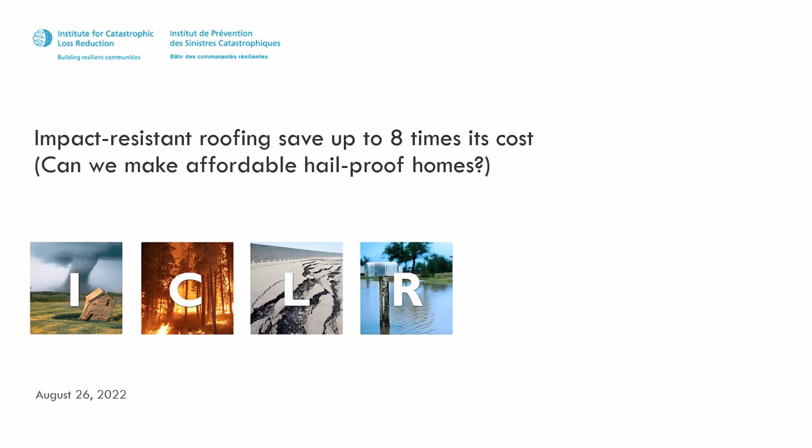All right, so with that, those preliminaries out of the way, let me introduce the topic of my presentation today. In 2021, ICLR began a study of how homeowners and insurers can save money by preventing hail damage using impact-resistant asphalt shingle roofs. And today I'm going to tell you how that study concluded after feedback from many of our members. The headline of that research is that society saves up to $8 in avoided future losses per $1 of cost, and insurers, by the way, save up to $3 per dollar spent considering retention rates.

The motivation here is that hail is among Canada's most expensive natural hazards. It costs almost $400 million annually. A June 2020 hailstorm at the edge of Calgary damaged 70,000 homes and cost $1.3 billion. A direct hit on Calgary could be 5 or 10 times worse. That's a very costly natural disaster. And although that hailstorm is inevitable, the catastrophe, the economic catastrophe, is not inevitable.

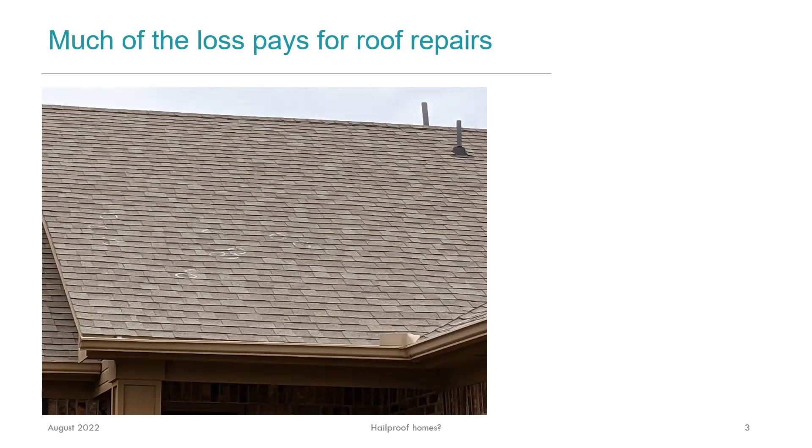Much of the losses that we see in hailstorms come from roof repairs. You can see in this picture, these little chalked circles indicate damage to roof shingles. This is in the Norman, Oklahoma hailstorm of April of 2021. We can reduce or prevent a lot of that loss by using impact-resistant asphalt shingle roofs instead of standard shingles. They look the same, but the impact-resistant ones have a special material that makes them resistant to damage.

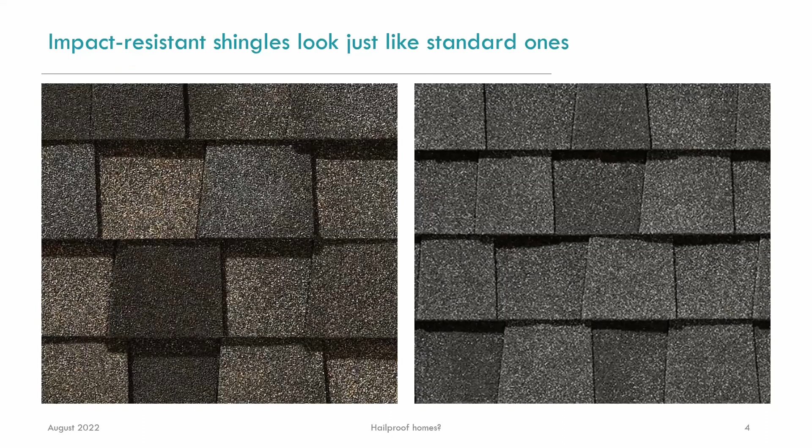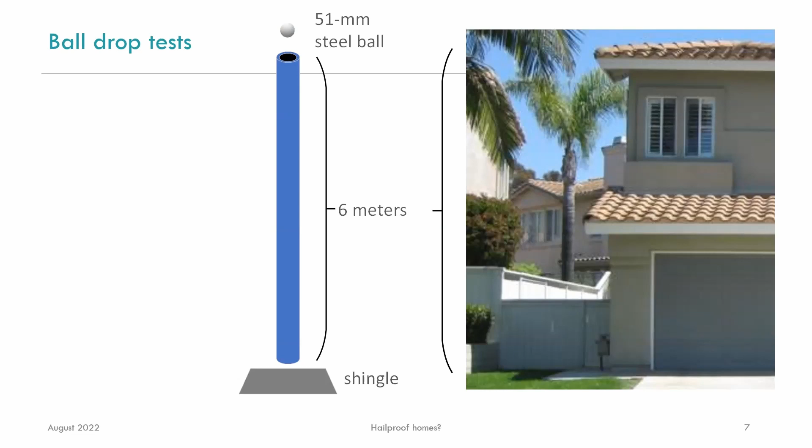In fact, you can take 51mm steel balls like this, each weighing half a kilogram, and you can drop them from a height of 6 meters, like the height of a 2-story building, onto a shingle without damaging the shingle. And that's like the strongest impact by the biggest hailstone in 99% of storms that you can resist with these shingles. Now, in order to estimate the costs and the benefits of these impact-resistant shingles, we actually had to create an entirely new analytical methodology.

I'm an engineer, so I used engineering techniques, a new technique that fits into the broad framework that engineers call performance-based engineering. And unlike most of what structural engineers do, we use building codes, and sometimes we use pass, no pass, or graded ratings. This performance-based engineering framework allows us to do some pretty neat things. We can estimate the behavior of a system, an asset like a building, in terms that people care about. Repair costs and life safety impacts and loss of functioning, or as I call them, the 3Ds, dollars, deaths, and downtime. We can treat all of the important sources of uncertainty in this analytical framework.

We can avoid reliance on expert judgment, and we can make interesting business claims about design choices without having great big piles of actuarial data on the performance of whole systems, hundreds or thousands or tens of thousands of buildings in past hailstorms. We do this by creating mathematical models that are built from bite-sized pieces of the whole process, rather than just collect a whole bunch of data. Here are 10,000 houses, and this is how many hailstones hit each one, and here's the repair cost. We build up our mathematical model from individual pieces that are more tractable.

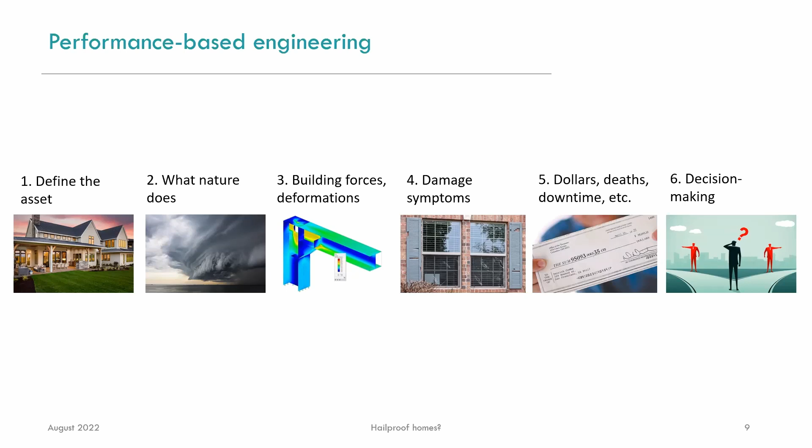So unlike building codes and most rating systems, we can estimate those behaviors in those terms of interest. We can measure all the important sources of uncertainty. When will the storm happen? And is it likely that hailstones would damage a particular shingle, etc. We can avoid recourse to expert judgment. As I mentioned before, we don't have to wait and have a great big pile of actuarial quality data on the behavior of the whole system.

We build it up from bite-sized models, and each one of those bite-sized models we can improve incrementally. The meteorologists are constantly improving our knowledge of how frequently hailstorms will occur. The Institute for Catastrophic Loss Reduction has a project right now with Western University in which Western engineers are out in Alberta collecting hail data. They observed Canada's largest ever hailstone just a couple of weeks ago. And from that data, we are going to be able to improve our model of what the environment does, what nature does to the buildings.

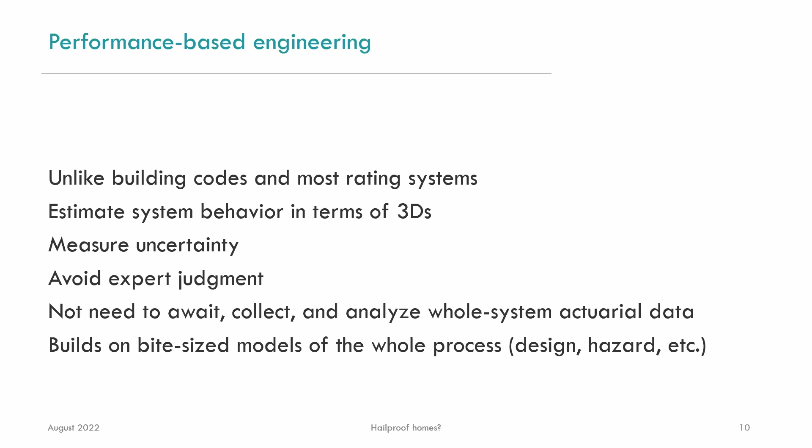So anyway, by these little improvements to the pieces of the model, we can improve the whole model and make better assertions about, like, the business case for code improvements, or the business case for building back better after a disaster. When we implemented this performance-based hail engineering method, we were able to estimate the costs and benefits of hail mitigation, at least this one thing about replacing ordinary shingles with impact-resistant asphalt shingle roofs. And here's what we found.

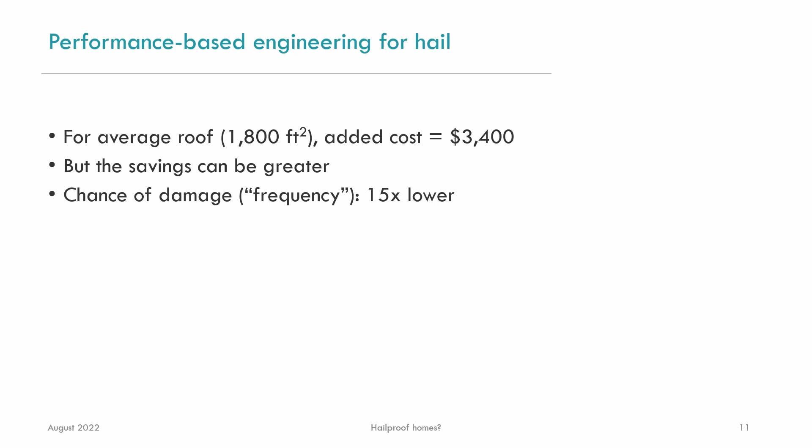First, impact-resistant shingles add about 50% to the cost of a roof. And for the average roof, that's about $3,400. But in many places, the shingles save more than they cost. Impact-resistant shingles reduce the chance of damage by 15 times. And if the roof is damaged, the average repair cost drops by half. As a consequence, in Calgary, considering how frequently hailstorms happen, the shingles save $10,000 over the 20-year life of the roof. That's a benefit cost ratio of 3 to 1. The shingles pay for themselves in 5 years on average.

An insurer with a 90% retention rate would save $4,200 over the life of a policy in Calgary. Now, there are places with twice as many hailstorms as Calgary gets. In those places, society saves more than twice as much. In those places, society saves up to $8 per dollar of cost, and insurers save up to $3 per dollar of cost. And that's ignoring cases where an insurer inherits an impact-resistant roof that a prior insurer paid for.

So the inheritor of a roof, of a policy where somebody else paid for the impact-resistant shingles, the insurer doesn't pay for it. The benefits flow entirely to the insurer. Or if you are a homeowner and you're not carrying insurance, or it's not adequate, the homeowner gets those benefits.

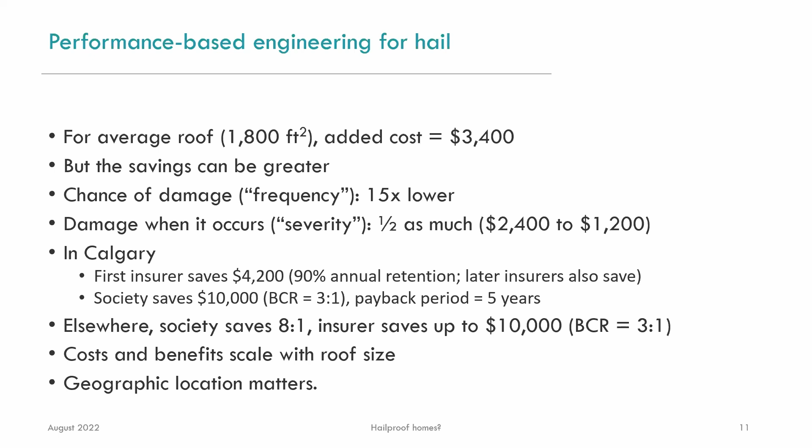Now, those costs and benefits scale up or down with roof size, and obviously location matters. Places with more frequent hailstorms get more benefit, and less frequent hailstorms mean less benefit. And of course, the size of the roof matters. Bigger roof, more cost, more benefit. Smaller roof, less cost, less benefit.

Now, let's talk about the parts of an asphalt shingle roof, just so you know what's going on under this roof. The little circle number 1 shows roof joists, and they're spaced between 400 millimeters and 600 millimeters apart, and they hold up the roof.

That number 2 there is structural sheathing, like plywood or oriented strand board that might be 8 millimeters thick or 16 millimeters thick. It's nailed to those roof joists with 2.5-inch long nails spaced about 6 inches apart at the edges, and 12 inches apart in the middle of the panel. One tacks on top of that structural sheathing, that number 2.

Number 3 is an underlayment of asphalt saturated paper, weighs 0.19 kilograms per square meter, or 90 pounds. That's 90-pound paper. Or you can tack on number 15 asphalt saturated felt, and that serves as a supplemental moisture barrier, and it also prevents adhesion between the roof sheathing and the shingles that are just above it.

The underlayment is optional in some codes and standards, and mandatory in others. So number 3 will appear on some roofs in some eras and not on others. The top layer comprises the shingles, and overlapping layers of shingles. These are nailed to the roofing deck with 4 or 6, 10 or 12 gauge galvanized nails per shingle, and adhered to the layer below with factory applied heat activated sealant bands.

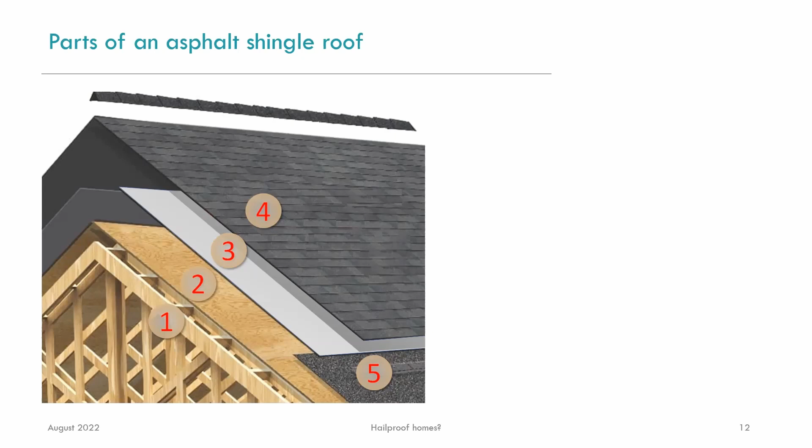And then there's other potential problems as you add layer after layer. And in some cases, you have to add eave protection, such as felt underlayment from the roof edge to 900 millimeters up the roof slope. When you zoom in closely on the asphalt shingles and sort of cut a cross section, it sort of looks like this little diagram here.

That cross-hatched layer in the middle, that's a fiberglass mat, and that serves to shed water and to adhere the ceramic coated crushed rock particles. They're called granules. Oh, I'm sorry. I beg your pardon. Number 1 is a fiberglass mat that provides the shingles strength and stiffness. Numbers 2 and 3 are the asphalt layer that sheds water and is there to adhere the granules that are number 4.

In that layer, there's finely ground fillers or mineral stabilizers in the asphalt that improve the asphalt's fire resistance and its flexibility and its durability and its resistance to weather. Number 4 is these granules. They coat the upper surface of the shingle, and they provide its color, and they protect the asphalt from ultraviolet light, which degrades the asphalt.

And on the back surface of the shingle, that number 5, that's coated with a fine mineral that prevents the shingles from sticking to machinery during manufacturing and sticking to each other while they're being stored.

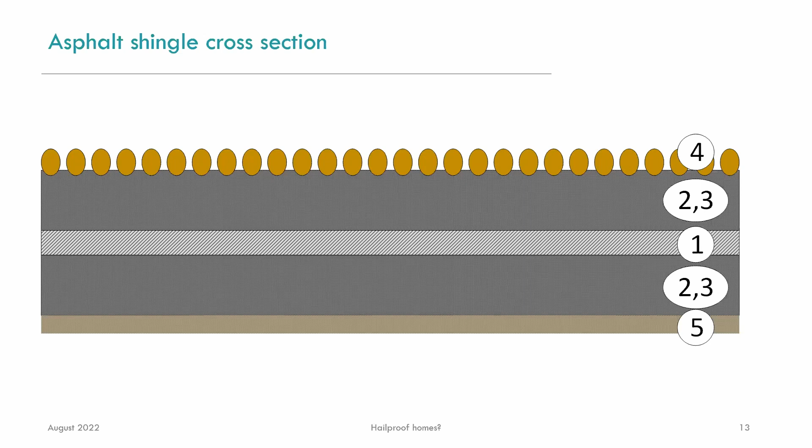So in order to estimate costs and benefits, you have to drill down and find out what is it going to cost to put on these impact resistant asphalt shingle roofs, as opposed to non-impact resistant asphalt shingle roofs. I told you that the cost is $3,400 for the average size roof, or here I've rounded it to $3,000, but there's a wide range of lines of impact resistant and non-impact resistant shingles.

This is part of a big table in our study that says, here's the price for this product, and this is where we found this price, and it's a price per roofing square, per 100 square feet of roofing material.

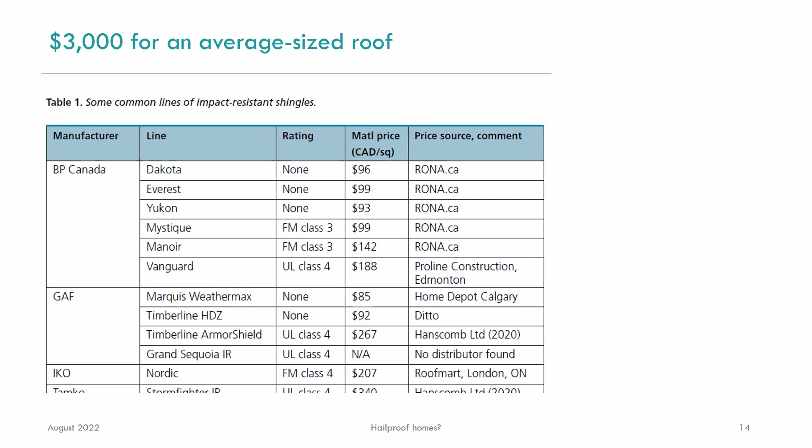And the table goes on and on with all the different products that we were able to find published prices for.

As part of this process of developing performance-based hail engineering, we had to create mathematical models that related the size of the hailstone that hits the shingle to the chance that a single shingle will be damaged. And the damage takes a couple of different forms. It can be purely cosmetic, where it knocks off a bunch of granules and you can see these nasty looking bruises, or it can break the shingle, breaking the moisture barrier, allowing water into the roofing and into the attic. And oftentimes those two things go together. They tend to happen at about the same time.

You hit a shingle with a hailstone strong enough, and it will both create a bruise and break the moisture barrier. This set of curves here relates the size of the hailstone on the horizontal axis with the chance that you're going to break the individual shingle on the vertical axis. And there's 4 curves there, and the one labeled 4, for instance, this point right here says that if you hit that shingle with a hailstone of about 80 millimeters diameter, there's a 50-50 chance that class 4 shingle will be damaged.

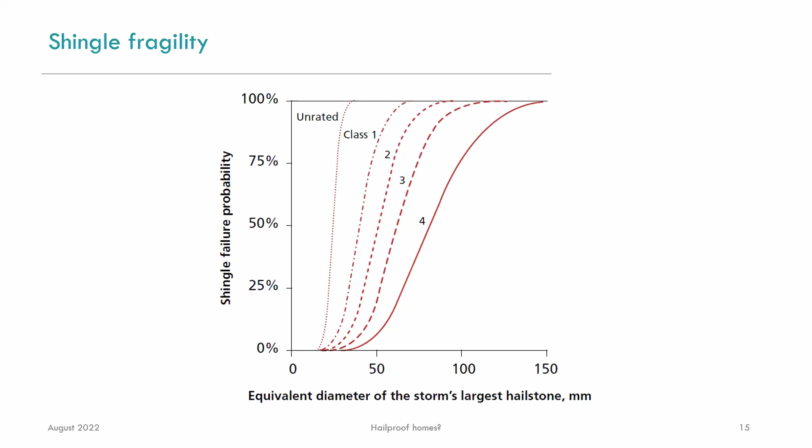And you can take this model and scale it up to the entire roof, so that with some knowledge about the density of hailstones and the distribution of hailstone size, you can estimate, as a function of the storm's largest diameter hailstone, the average fraction of the roof that you're going to have to replace. With that knowledge, you can go to cost estimation software like Xactimate or other cost estimation tools and estimate the repair cost.

And the repair cost involves a whole bunch of steps. It involves demolishing and replacing the underlayment, the material and labor to demolish and install the shingles. And those costs have low, moderate, and high values. There's a range. We were able to estimate a total cost per square and a marginal cost per square and so on to do the actual repairs.

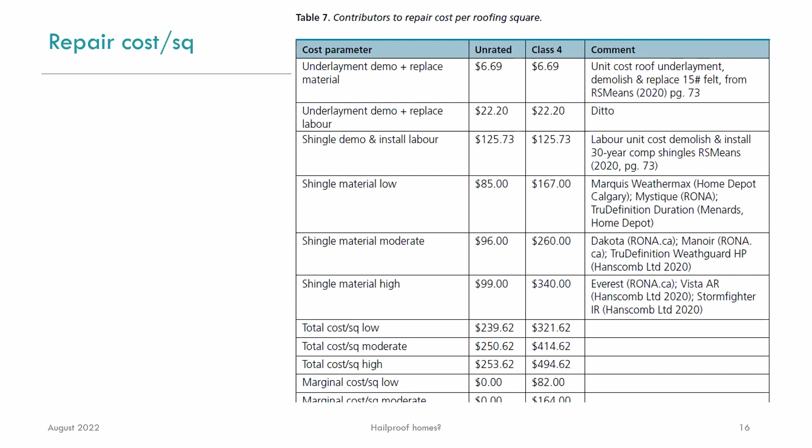You put all of this together in a mathematical model, and you can find where in Canada impact resistant shingles save more than they cost. This map shows the places where impact resistant shingles are cost effective at a societal level. That is, when you add up all the costs and all the benefits, both to today's owner and future owners and so on. Any place that's shown in yellow here, the total benefits exceed the total costs. That is much of Canada. It's not just near the Rockies, but across a lot of Canada, even today, there's enough hailstorms to make impact-resistant shingles cost-effective in all of these places.

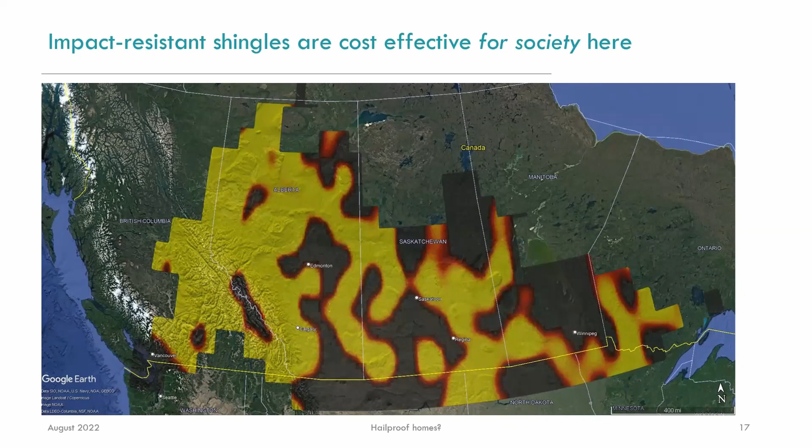And of course, as climate change takes stronger grip over the next 20 years, that'll make future hailstorms worse. It will increase the value of having impact-resistant shingles, because ordinary roofs are going to be more likely to be damaged and more heavily damaged, which means that if you've already switched to an impact-resistant roof, the more frequent the storms, the more you are going to save through avoided future losses.

If you only consider the insurer's perspective, the insurer might have a policy where the homeowner has just put on a new impact-resistant roof, and that insurer will get all the benefit of avoided losses over the next year during the policy period, and then with a 90% chance or so, give or take, that policyholder will renew next year, and that impact-resistant roof will continue to provide benefits to the insurer next year. And then there's a 90% chance or so that the insured will renew again, and so on.

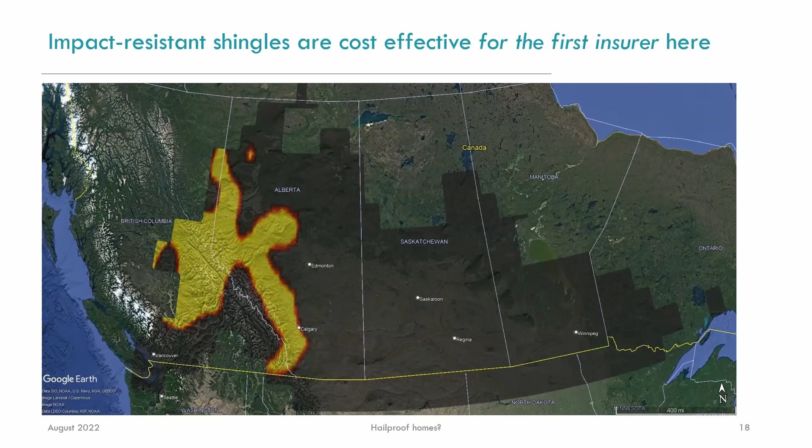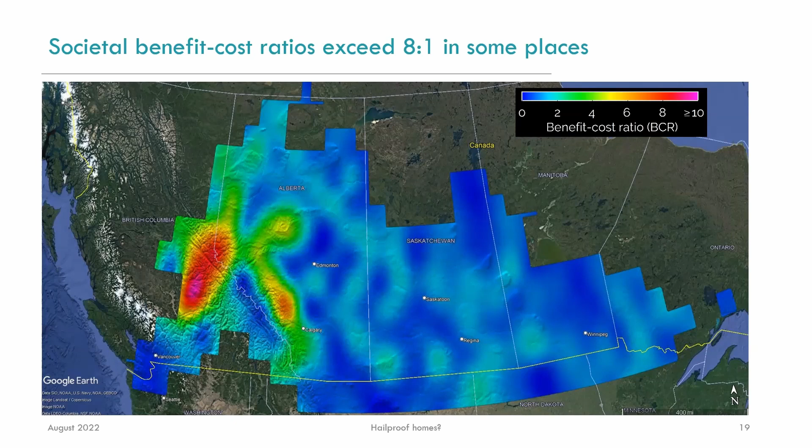In short, we found that protecting a home from hail makes financial sense across much of Canada, including to insurers who only get a part of that benefit. So please see our webpage for more information about ICLR's Hail Smart program and about this performance-based engineering study, the work that we've done so far. But we are not yet done. We have a long-term research program. There are many questions about the costs and benefits of different kinds of hail mitigation. And ICLR means to pursue that long-term research program.

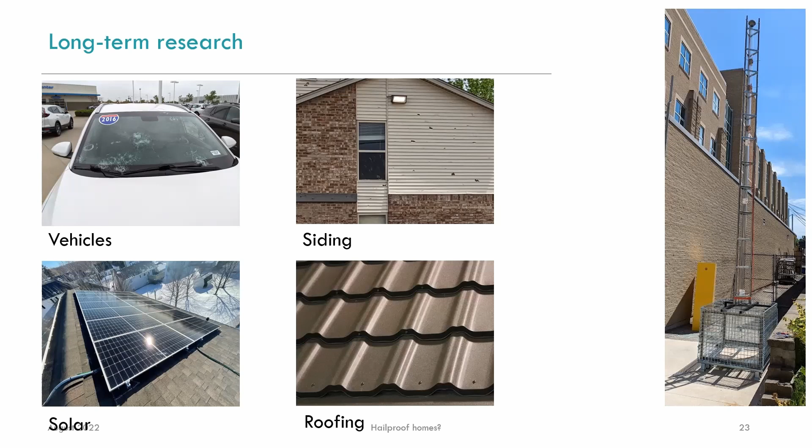So that's how we're going to keep going with this research into hail resilience. Now, all of this, it's not about producing journal articles and getting our name spread out there. This is really all about how to make change, how to make Canada more resilient to hailstorms. And we're doing that basically three different ways.

We're doing outreach like this to spread the word that impact resistant roofing is cost effective, and here's where it's cost effective, and here's where it isn't, basically making the case that impact resistant asphalt shingle roofs can be cost effective. We're also working with a building official in Calgary. He's formulated a code change request that uses our benefit cost analysis as justification for requiring impact resistant shingles, at least in some places.

And a third way that we are helping to bring about change is that through our Insurers Rebuild Stronger Homes program, we're hoping that some insurers actually offer insurance coverage where they will pay for the added marginal cost of impact resistant shingles. So, historically insurance has repaired stuff like for like. So you have an ordinary shingle roof and it's damaged by a hailstorm. Well, the insurer's obligation, according to the policy, is to replace that roof with something that's just like it.